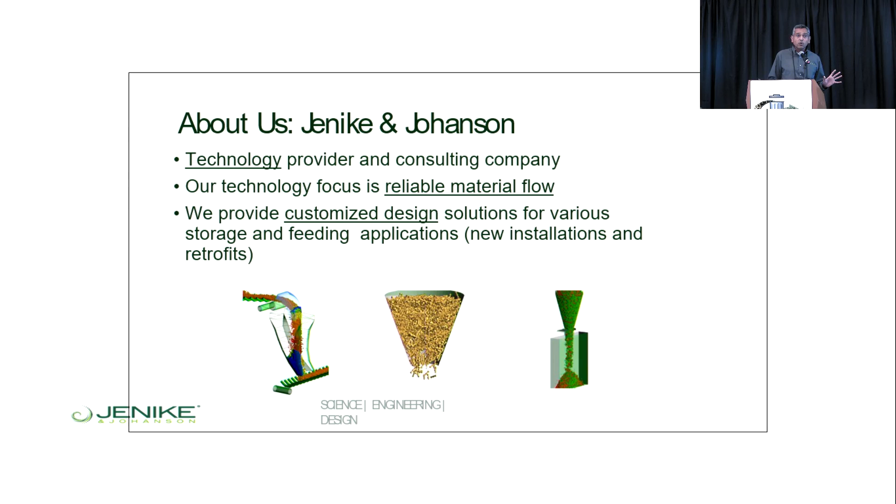So about Jenike and Johanson, really quickly, we are a technology provider and consulting company. We work primarily in the area of achieving reliable flow of bulk materials, and we provide customized design solutions for various storage and feeding applications. This applies to new installations as well as retrofit projects.

The technology of solids handling, and when I say solids handling, some people call it solids, some bulk solids, some bulk material - they're essentially the same thing from our perspective. This technology is based on the work done by Dr. Jenike in the 1950s and 60s. He founded our company based on that theoretical development, and here we are 55 years down the road, using this bulk material handling technology for all kinds of industries wherever there is bulk solids handling - whether it's mining, plastics, biomass, or waste materials.

Sorry, I think we did some last-minute conversion from PDF to PowerPoint, so you may see some text realignment - I apologize for that. But typically in any project that we do, to get to that customized design solution, the steps involved are testing of your feedstock, then analysis of its flow behavior, and then coming to that reliable design recommendation.

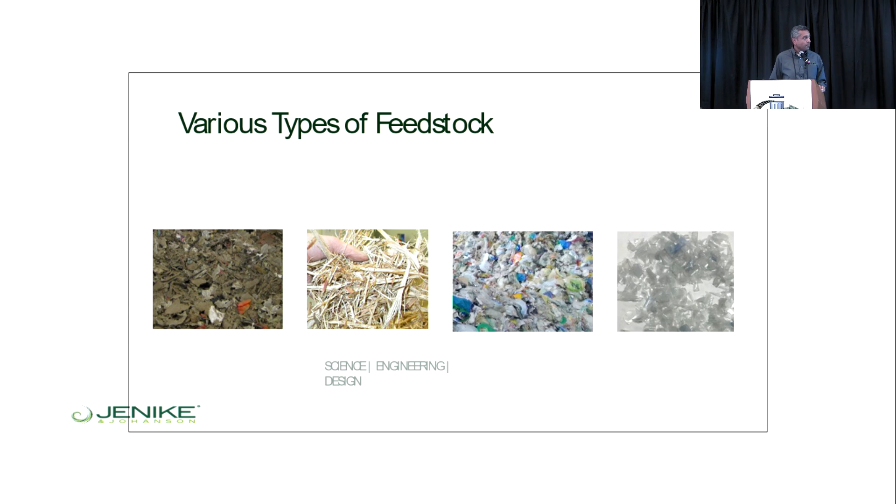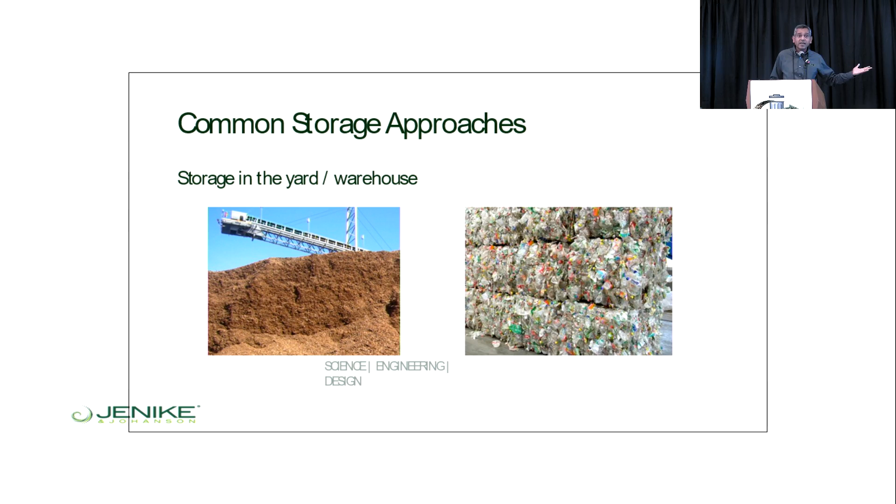Just to orient ourselves, in case you're not attuned to the day-to-day operations of bulk solids handling: for a typical waste conversion process, whether it's plastics, biomass, or any other kind of waste, when looking at handling in the yard, primarily there is a storage facility. It can be an open storage like a stockpile or pile in the yard, or a covered storage, such as a covered warehouse where bales can be kept. You'll need to reclaim reliably from these kinds of storage situations. Then there can be storages such as large silos, or there can be small hoppers which you'll be feeding out from. This discussion applies to all that equipment.

So first, let me introduce you - or many of you may already be familiar - to the various flow issues that can occur when you are handling your feedstock.

One of the biggest problems you will see, especially when handling feedstocks through bins, hoppers, or silos, is arching or bridging problem.

Here, for example, you are looking at your silo or bin, and the feedstock stored in there. That can be municipal solid waste, biomass, or some other raw material. Based on the characteristics of that feedstock and the design features of that silo - diameter, height, hopper angles, outlet size, internal surface and smoothness -

all those play a role in determining the net flow behavior. How does it perform, how does it operate, does it give you reliably the discharge rate you are looking for? All those factors together determine that.

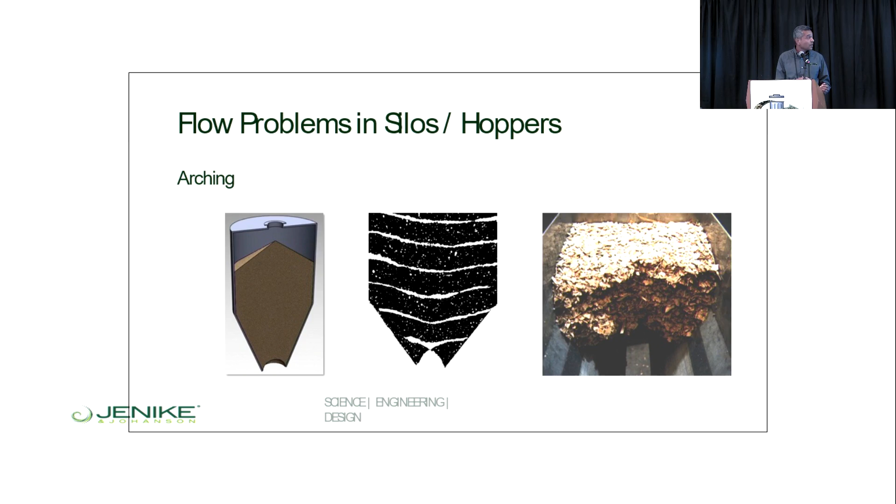All of this material here is just sitting stagnant. It's not moving - it's almost like a dead capacity or dead material. So unless something happens - either you use a lot of vibrators, air cannons, air blasters, some kind of aids to get that material moving - unless you do that, it's not coming out, and it's occupying all of your precious storage capacity.

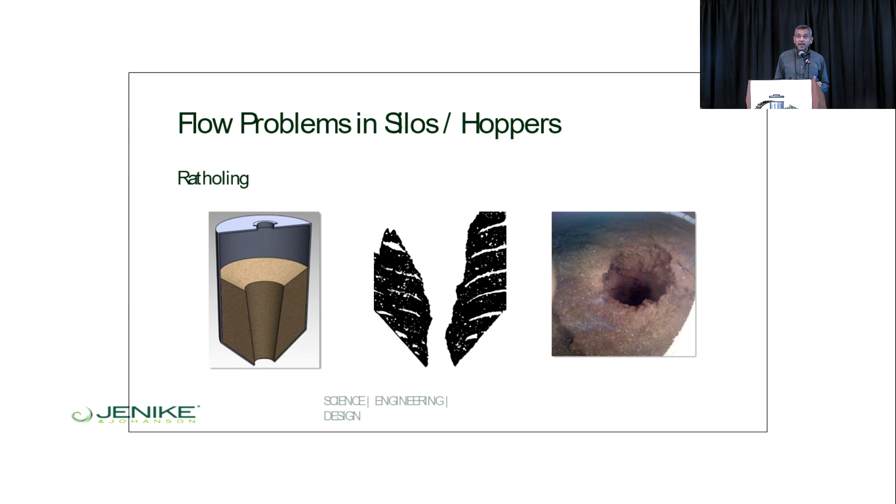So again, same kind of implication as bridging problem - when this occurs, you are not getting material out of the silo and you are starving the downstream process. Here is an example - we are looking inside a silo, looking at this flow channel here and all the dead capacity that's not discharging.

So we talked a little bit about designs of silos and hoppers. Again, when I use the term silo, it really applies to any kind of storage equipment based on gravity flow - so it applies to hoppers, bins. But the other important piece is the feeder beneath the silo, whether it's a belt feeder or a screw feeder. The purpose of the feeder is to withdraw material from the entire outlet of the silo or bin.

When the feeder is not designed properly, it often pulls a channel in the hopper section directly above it. So even if you do a good job getting the silo designed correctly, if the feeder design is not correct, you're still going to have problems in your hopper or silo, and that's still going to starve the process - resulting in erratic flow, unreliable feed to your reactor, incinerator, furnace, or boiler, as the case may be.

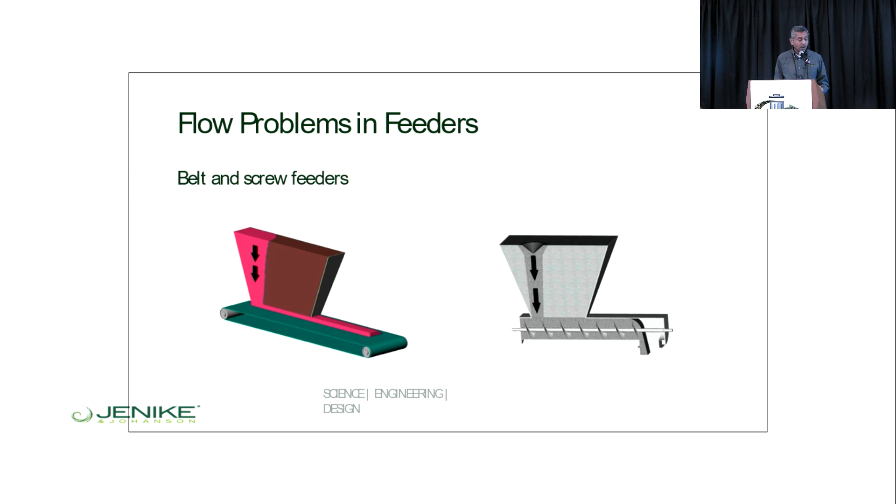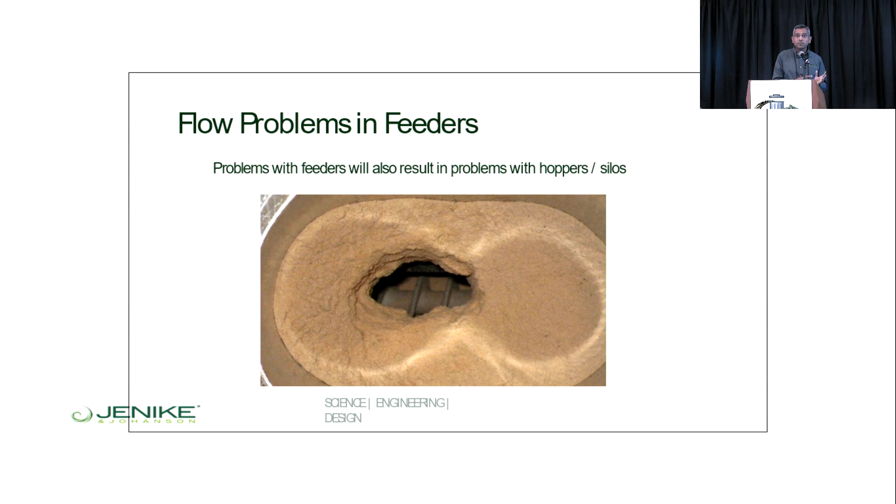So these kind of design features can really play a substantial or critical role in the success of your reactor or whatever is the end process unit. So again, it's really important to get the design of the feeding system and the storage system correct.

Another thing to keep in mind is these materials, oftentimes when we're talking about MSW or biomass, they tend to be very compressible, and under certain conditions they can exert significant pressure because of packing. Oftentimes it will result in issues such as failing of flights breaking off or welds coming off. So those kind of issues can occur when handling these materials, especially if the design is not correct.

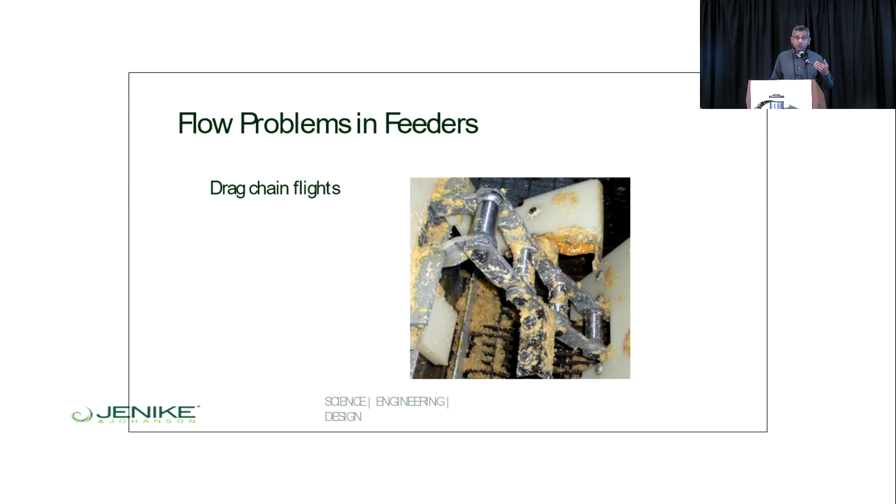Drag chains are commonly used as conveyors, but in cases when they are used as feeders directly underneath a silo or hopper, they experience significantly higher pressures. And in those cases, you can also see the flights breaking off because of the pressures and compactions.

So when you look at these problems, ultimately what are they costing? They're costing downtime, requiring manual intervention, and causing lost production. Often, whenever these problems occur, you're not able to supply to your reactor or downstream unit at all, or maybe you can supply but not at a consistent rate. There is no steady inlet stream to your reactor, and that messes up the operation of the reactor.

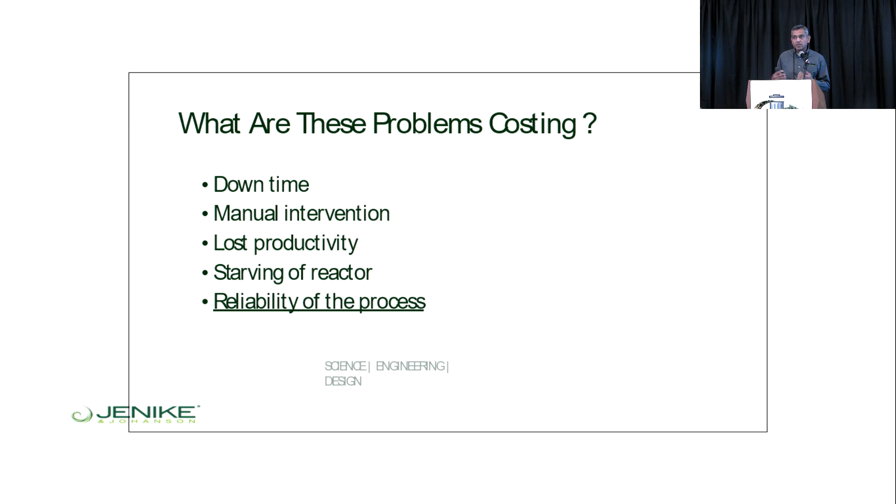So all these issues can occur, and they can take away the reliability of the process. Sometimes people look at material handling and say, okay, we figured out the chemistry, we know how to do this, we are all good. But if you can't get your feedstock reliably to the reactor, problems can still occur.

So why do these problems occur? They can occur, one, because of the nature of material or feedstock you are handling. Typically, whenever we look at waste conversion technologies, most feedstocks, whether MSW, biomass or crop waste, tend to be lightweight, having particles that are very asymmetric, slender, with nesting tendencies, interlocking tendencies, and oftentimes significant moisture content. It's the combination of these things that makes that feedstock challenging to handle.

Secondly, feedstock is only one side of the coin. You also have to look at your bin, silo, or hopper and feeder design. Even if you have challenging feedstock, if you design the handling system correctly, you can still get reliable flow. But if features of the handling system, such as hopper angles, outlet sizes, or surface finish, are not properly done, then you can have flow issues.

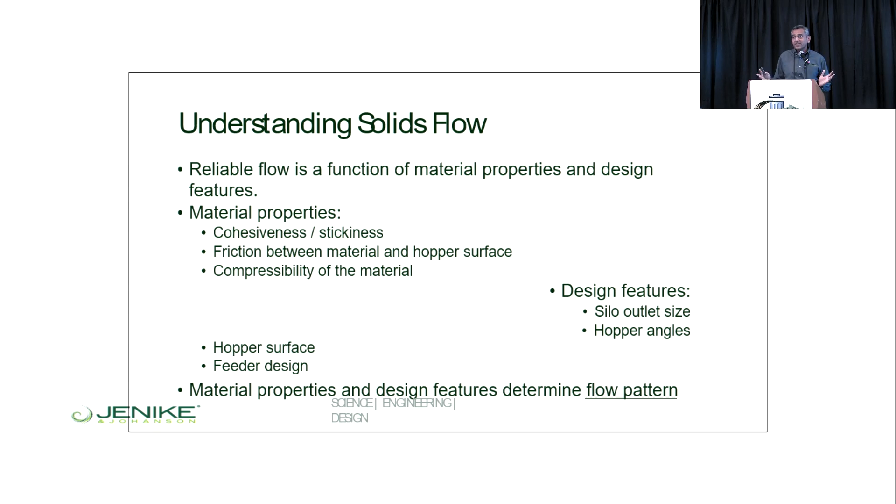Ultimately, the flow pattern that occurs inside a bin or silo is dependent on these things, and there are two main flow patterns. There is funnel flow, where, as we saw in earlier slides, a channel forms directly above the outlet, and a rat hole may form if material has sufficient stickiness, with stagnant material around it. This problem occurs when the friction at the hopper walls is so high that it causes the material to remain stagnant.

And what goes wrong when you have a problem like this? Obviously, channeling occurs. You get a first-in, last-out flow sequence, because whatever comes in first in the silo goes here and stays there until all of it empties out.

Rat holes can form, and then you have limited storage capacity because of this dead material just sitting there. Erratic discharge occurs, and particle size segregation issue gets worse.

Whenever you are handling a feedstock with fines as well as larger coarse particles, usually when you fill a silo or bin, what you will see is that the bigger particles concentrate towards the walls, and the fines concentrate in the center.

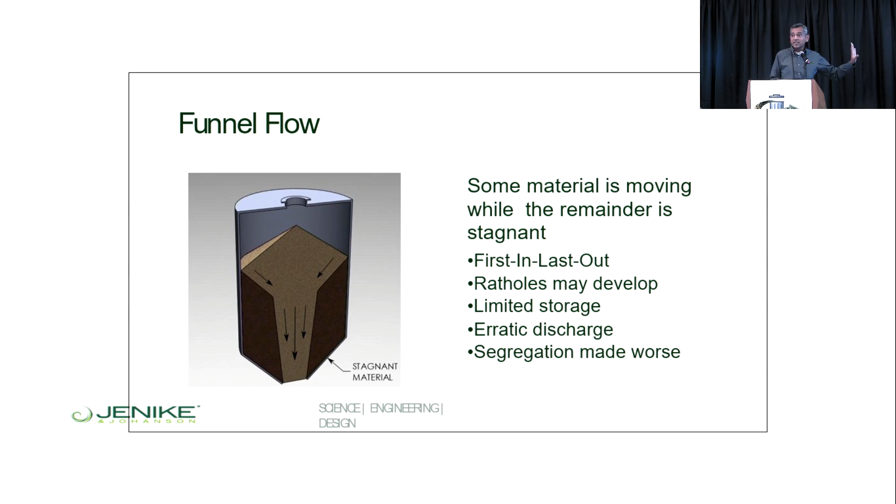So funnel flow has a lot of issues, and a good design should try to achieve what is known as mass flow. Mass flow is defined as a flow pattern where all of the material is in motion when you are discharging. There is no stagnant material.

And this doesn't happen on its own. You have to design the hopper or silo features, the hopper angles, outlet sizes, surface finish, all of that appropriately so that everything is moving when you are discharging.

But the benefits you get out of it are first in, first out, because again, there is no stagnant material. Rat holes cannot develop here. There is no channeling, and you get full storage capacity. All of the capacity is live. There is no dead region.

You get uniform discharge, and segregation is minimized because in mass flow, everything is in motion. So as you are discharging, material in the center mixes with material at the hopper walls at the point of discharge. And because of that, even if your material separated or segregated in the silo, at discharge there is some remixing that goes on, so it reduces the amount of segregation you see.

So a lot of benefits to achieving mass flow. But again, it just doesn't happen on its own. You have to characterize the material and design appropriately to achieve that.

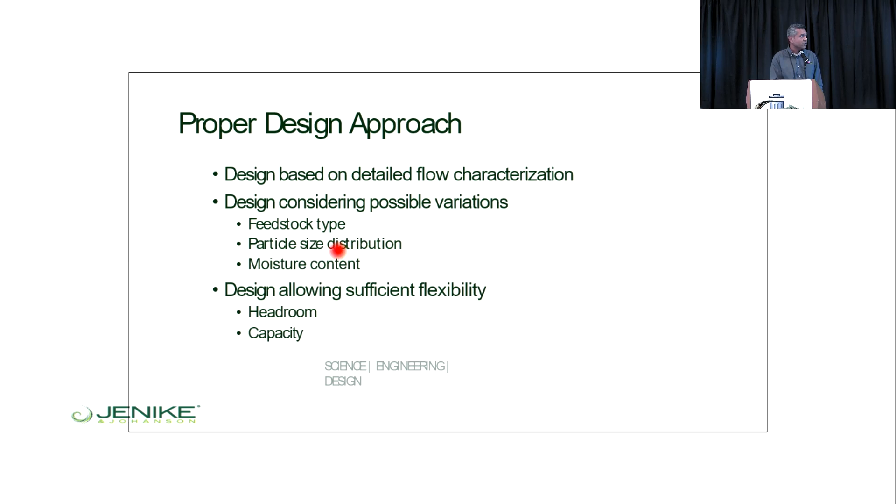So for how do you conduct proper design? Well, you conduct the characterization, get the properties of your material, and accordingly design your silo or feeders or other storage equipment, keeping in mind that these properties depend on particle size distribution, moisture content, among other things.

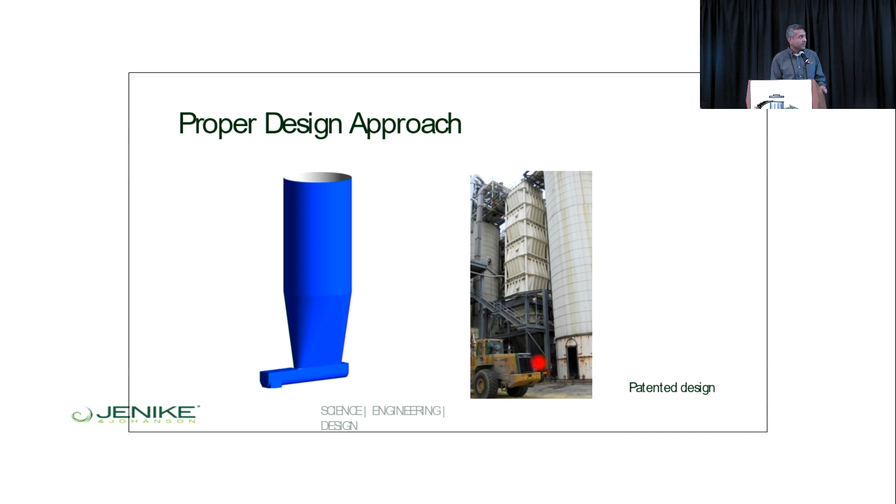And when you do that, you can design your storage equipment to achieve reliable flow. Here are just a couple examples showing how reliable designs look like for typical biomass materials. Here is one design, and here is a separate one, not this kind, but separate — that's our patented converging, diverging silo design.

And with that, I would like to conclude that technology is available to characterize feedstock and obtain that information to design material handling equipment. The design activities should be done especially considering type and nature of feedstock, particle size distribution, as well as moisture content. Doing so can save a lot of headaches with unreliable material flow.

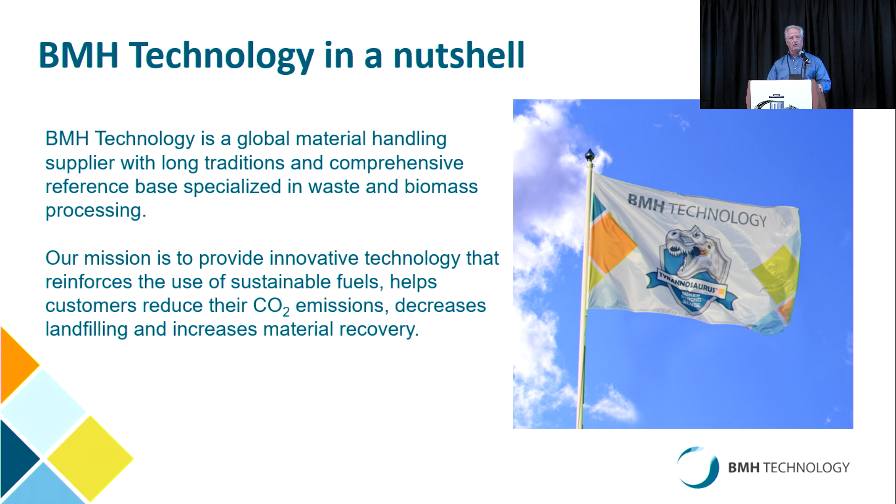In 2000, because of the drop in pulp and paper opportunities around the world, they refocused their designs on waste to energy type equipment. They redesigned their product line, designed a shredder to be the heart of their system. So their focus now is in waste refining solutions, solid biofuel, and their services department. They're focused, and their customers include power plants, chemical recycling. They still do some pulp and paper, a lot of cement kiln feeds, because we're preparing SRF, RDF from MSW, and biomass. Since 2002, they've delivered over 65 large waste handling projects, and the wood bio-based handling projects are in the hundreds.

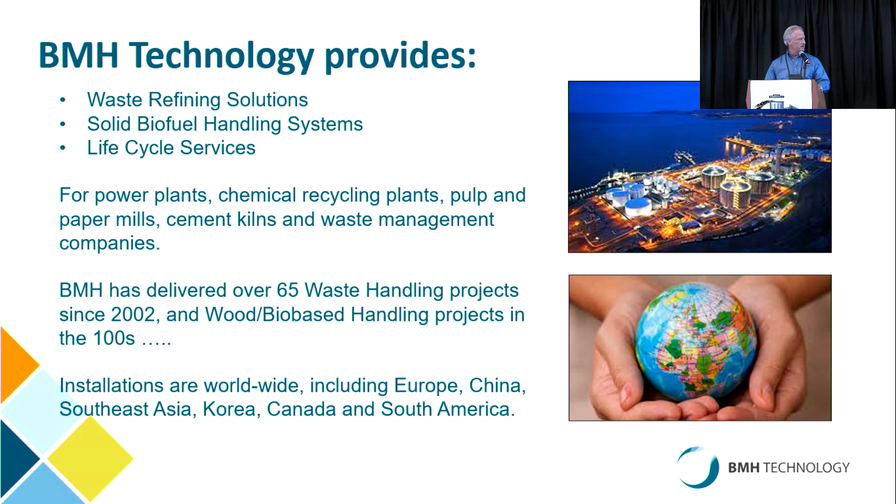Their installations are global, obviously in Europe, where waste to energy is an accepted technology. North America, less so. So their installations are everywhere but here, and we're looking to help change that for them.

You mentioned the trademark is the Tyrannosaurus. They latched onto that. They were looking for something that would help show what they were targeting their equipment to be, the biggest and baddest shredder handling equipment on the market. So the other focus they did is they looked at modular design and a compact design. Real estate's always at a premium, with a minimum footprint.

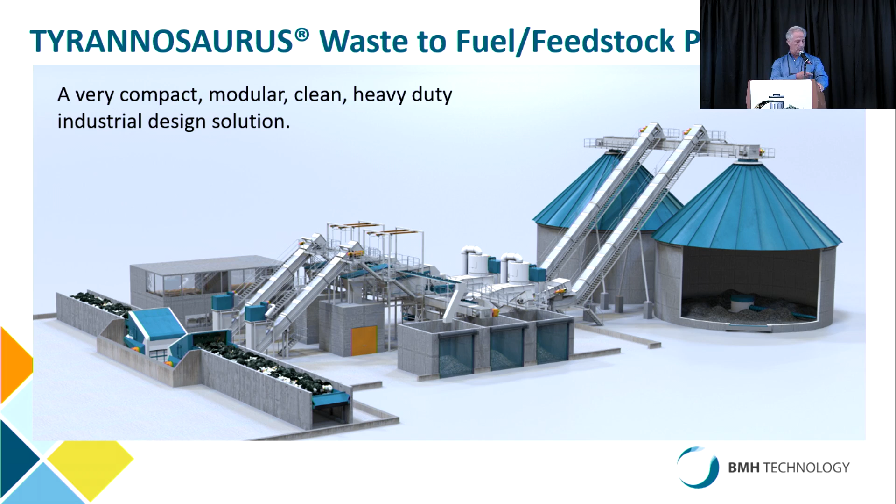Depending on the feed material and the fuel specs that you require for your processes, these large capacity facilities will typically require multiple lines of equipment processing between 30 and 50 metric tons an hour. So anytime I say tons today, I'm talking metric tons. The modular approach is typically broken into 3 modules: the receiving and crushing, a separation island, and the storage reclaim metering island. All of the components in these were designed specific by BMH for waste handling and or biomass, except for magnets and eddy currents, which is the way they buy out.

For the waste processing, waste to fuel and feedstock preparation, in the components in each of the modules, such as receiving and crushing, you have the step feeder, which is your large live buffer before the shredder, and it's got an automatic feed control to continually feed the shredder as it needs more fuel or needs more material.

The shredder, this particular model is the T9905, the largest unit they provide, with a capacity of 30 to 50 tons an hour, and that can make a product size less than 50 millimeters. Typically a lot of their facilities are feeding circulating or CFB type boilers for energy in other areas of the world, which will take up larger products up to 100 millimeters. But for gasification projects, the target is a lot smaller, around the 50 millimeter target.

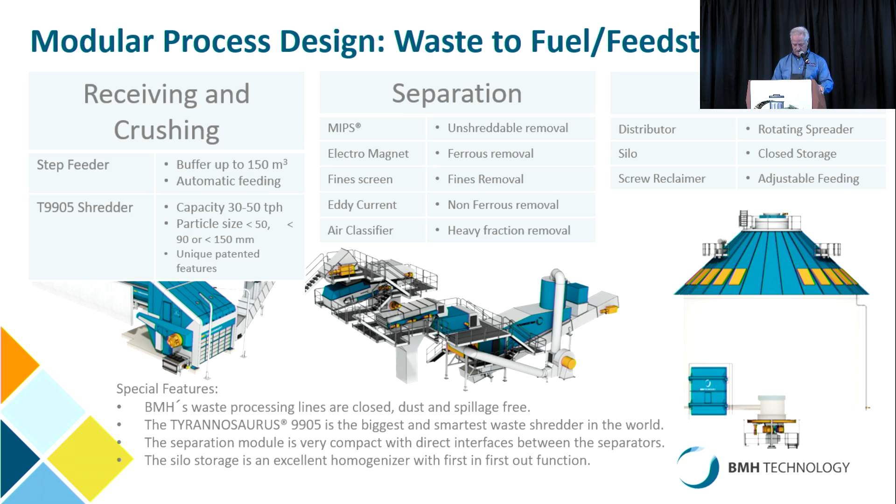And what are the Tyrannosaurus process benefits? One, it'll handle a wide range of residential and industrial waste. They're also very familiar with geographical differences in the waste supply. Obviously North American waste, European waste, and Asian waste are all different commodities, and they certainly understand all of those waste streams.

High capacities is one of the things they targeted in designing the system. They wanted to make it compact but easily scalable by adding additional lines as your capacities increase. It's fully automated, so your manpower to run this facility - you have an operator, and if you have a tipping floor and are manually feeding the feeders, you may have 4 or 5 guys feeding the step feeders, or a crane operator from above.

It's a closed system. All the equipment is enclosed. All of the drag chain conveyors feeding from island to island are enclosed, and that gives you the dust and odor control you're looking for in your system, and also eliminates spillage issues. The system has a negative air pressure and filtration system through all the conveyors and equipment, again to help support your odor control and dust explosion designs as required.

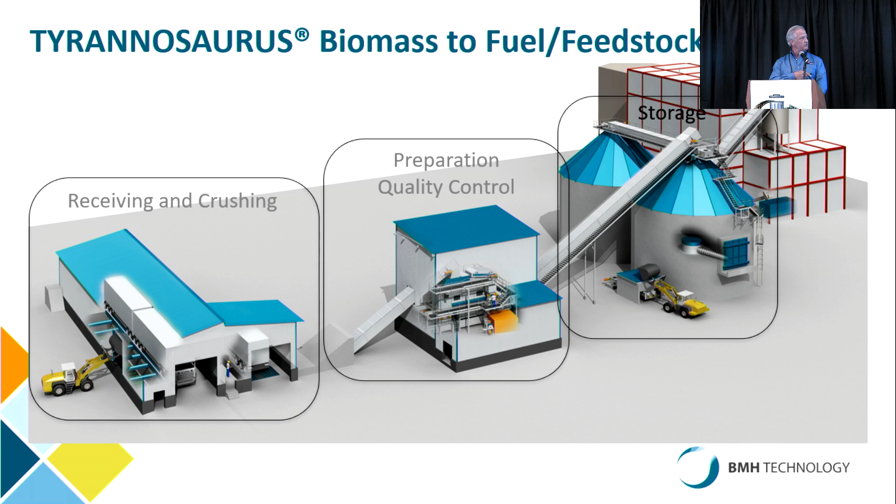Let me back up one. I should have told you a little more about the shredder, the Tyrannosaurus shredder. That shredder is the heart of their system. It's a ram-fed monoshear shredder, slow speed, 50 to 100 RPM. It's a large diameter, 1 meter diameter rotor, and the width of it's 4 meters, so you've got a very wide feed opportunity, crushing opportunity. But it's broken into 5 sections.

Each section's 800 millimeters wide, and that's part of the MIPS system. If you get a non-compressible in there, the machine will stop, open up that section, and drop out that contaminant. Instead of unloading your entire shredder, it'll only unload the section, get rid of that contaminant, close back up automatically, and go back into operation again. So what that does is help your uptime by eliminating the stoppage and going back to work again.

Zero gap cutting technology on this shredder - it's a very, very tight cutting tolerance between the cutting knives and the anvils, and it's hydraulically adjustable. So at the end of each shift, you can adjust your gap on your knife cutting quickly. And each knife rotates 4 times before you have to change knives again.

We talked about jumping ahead to the biomass. The shredder for the biomass is a twin rotor gravity-fed shredder. Their largest unit has a 6-meter-long in-feed with 6-meter-long rotors for very large capacity. It's a slow-speed shear shredder, or twin shredder, to minimize dust generation. In the screening, for quality preparation, you can have ferrous removal, oversized separation, and additional crushing.

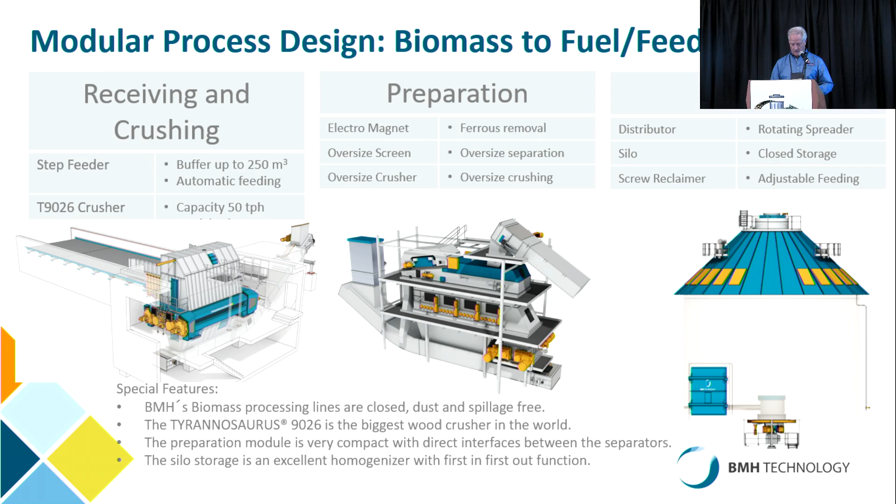We'll go over some specific installations they've installed. The first one is for Mälarenergi in Sweden, in the town of Västerås. This is a 3-line system, and their input into the plant is industrial, commercial, and MSW. This particular plant handles 480,000 tons annually. At the time, it was the world's largest integrated waste processing facility, along with the power boiler, a CFB boiler.

The plant, even though you see the field behind it, on this side it's right up against the town. So they're very proud of the facility, and they love to give tours. When the world opens back up again, we'll be glad to help you arrange to see a tour of this facility. It's quite beautiful, with a nice grass roof.

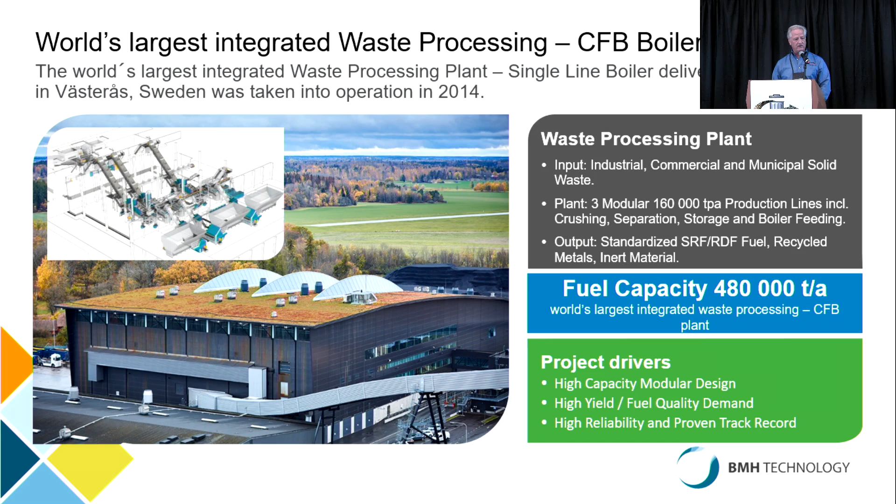Another facility in South Korea was installed and started up in 2016. It's a 2-line system, 300,000 tons a year for the feedstock. This is just SRF fuel preparation, so they take the material and sell it to the market, either for cement or energy production.

Last year, they shipped in and started up a plant in the Middle East, out in the middle of the desert. They don't require enclosed buildings there—you've got a lot of dry heat. This was a 2-line system for industrial, commercial, municipal solid waste, at 320,000 tons a year.

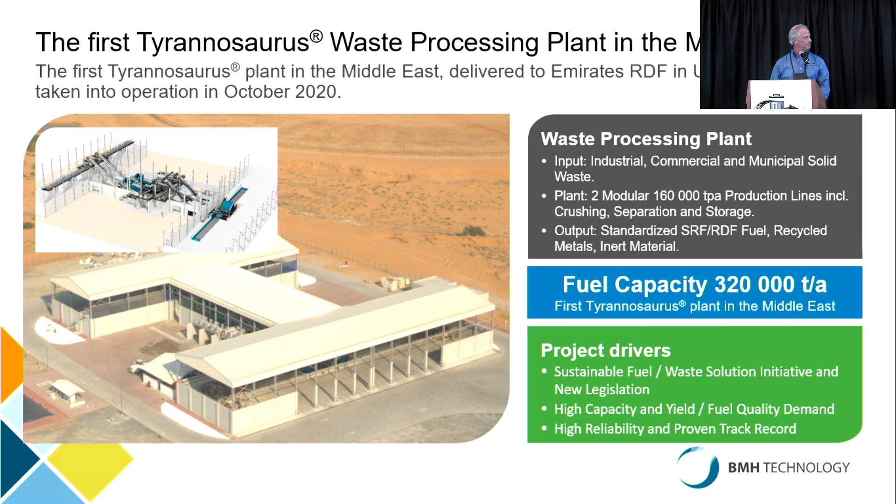For a biomass example, in Spain in 2020 they started up a very large facility, 550,000 tons a year, processing biomass, forest residues, eucalyptus, whole wood, branches, tops, and trees, feeding a 130 megawatt bubbling bed boiler. This is a 4-line system, and very large shredders are used in these.

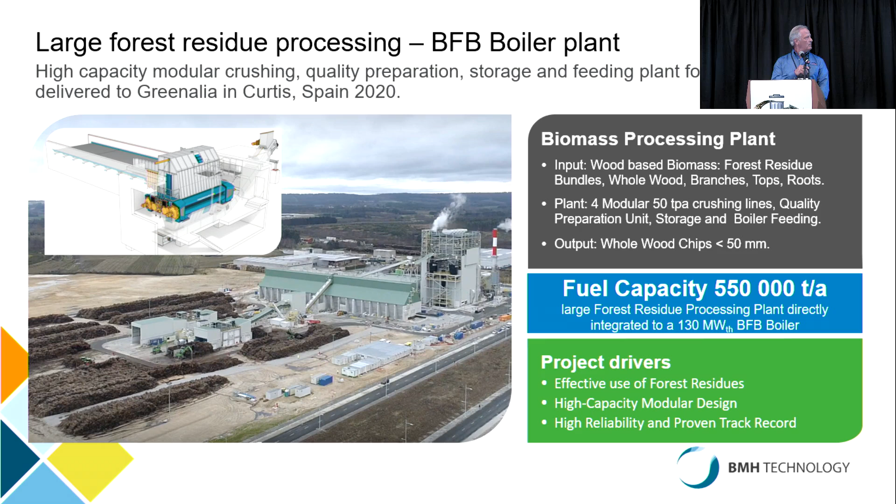And hopefully we've got a video queued up.

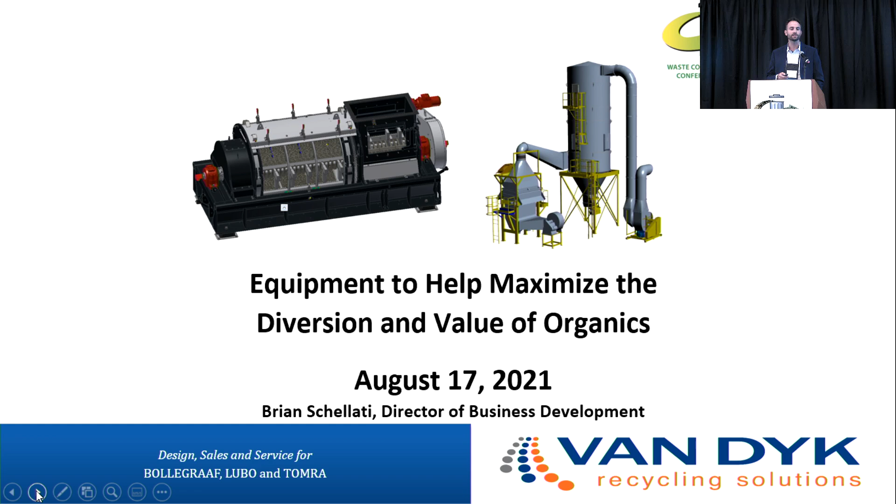Van Dyk Recycling Solutions is a turnkey sorting system supplier. We design, engineer, supply, install, do startup, commissioning, training, and after-sales service of all our equipment in many mixed material applications, such as single-stream recycling MRFs, construction and demolition debris processing, MSW and mixed waste processing, compost processing, e-scrap, and many more.

We just moved our headquarters to Norwalk, Connecticut, where we have the world's largest MRF education, testing, and training facility on site. We have 10 regional sales offices spread around North America, including 35 factory-trained service technicians throughout North America, including Canada and Mexico.

We put a real strong focus on service and making sure that all of our plants in operation experience minimal downtime. One of the many ways we do that is we keep over $19 million worth of spare parts in our Connecticut warehouse, which has at least 2 of every spare part required from any of our pieces of equipment all over North America.

We were founded in 1984. Since then, we've completed over 1,800 recycling projects. We've delivered over 450 full turnkey MRFs or plants. That includes over 550 sensor-based sorters or optical sorters and over 400 Bollegraaf balers.

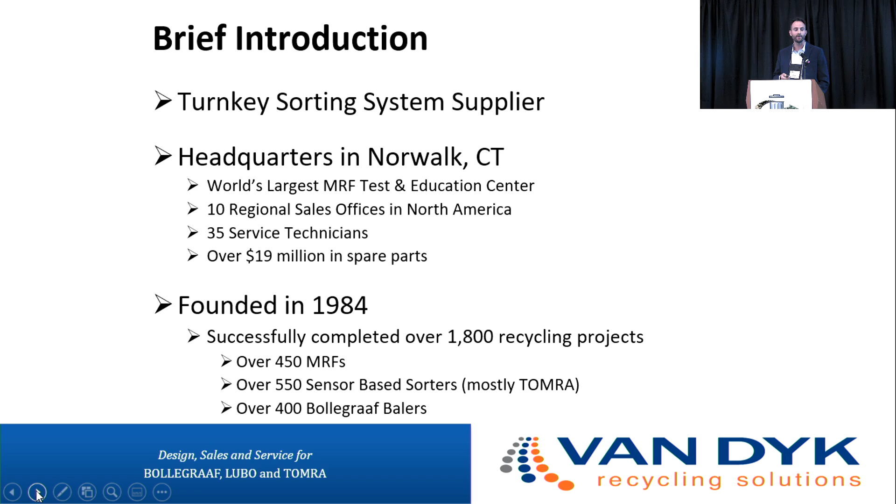This is what our new test facility in Norwalk, Connecticut looks like. Basically, we could take samples of mixed materials from our customers or from companies, and we can run it through our test facility, run the test, create a test report, be able to give real estimates on equipment capacities.

We are able to give real estimates on what is in the material that's being processed or what's in the sample, what of those materials can be recovered, and to what level or purity that material can be recovered. It's already been extremely valuable for several project developers, MRF operators, and also packaging companies.

The first piece of equipment I want to speak about is called a Smicon Organics or food depackager. There are several other types of depackagers that specifically California, some California waste haulers are already starting to use. This one is a European model. It was developed and really field proven over in Europe for over 20 years now. There's many of them in operation in Europe. We've actually just had our first one installed right here in San Diego that is now operational.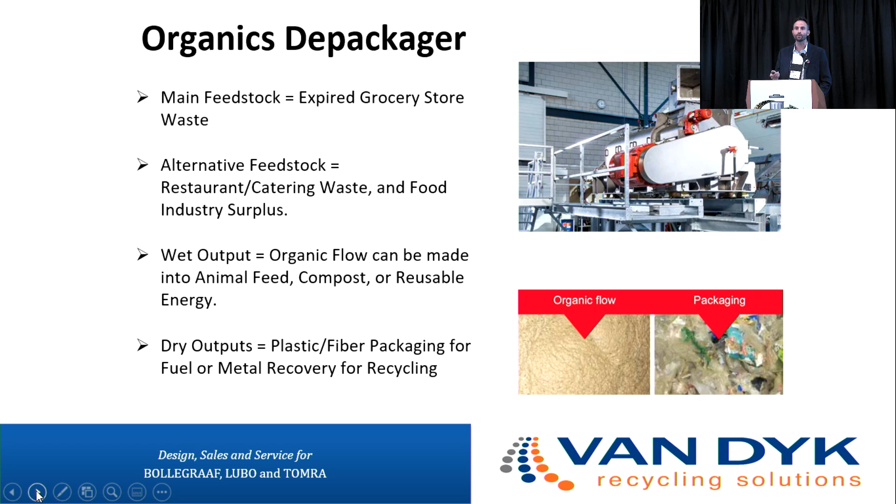One of the main advantages is that this one operates at an extremely high throughput, roughly over about 30 tons per hour, with minimal downtime, regardless of any type of input contamination. So how does it do that?

A couple key features. First, it has the original swing hammer design, so the paddles inside the unit, which you could see here, they're flexible. So if a heavy piece of contamination, like a big piece of steel, goes into the piece of equipment, it's flexible enough not to have that contamination damage the screen inside or cause any unexpected downtime.

Also, there's an extremely large inlet, and below that inlet is where we have the smallest holes in our screen, and that's really to maximize or keep the organics as clean as possible in that impact area at the beginning.

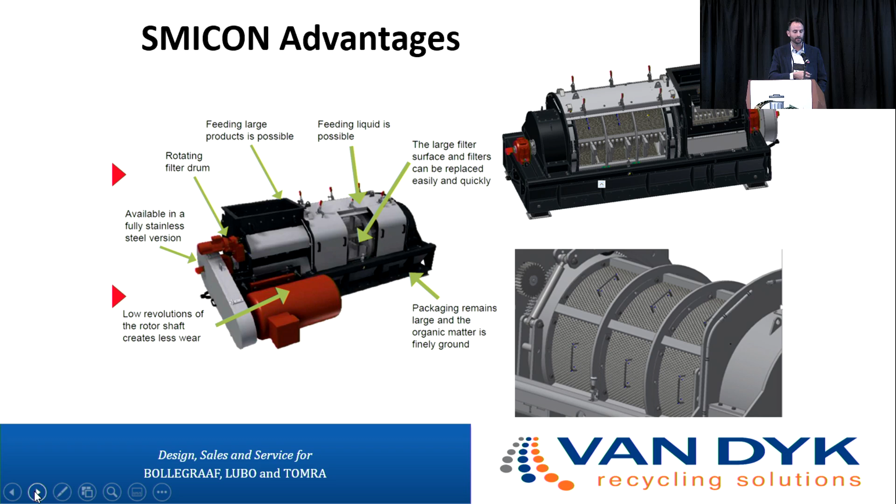Let's see if the video works.

There we go. So this is actually a video of one of our mobile demo units. It's a full-scale unit that we can send to a customer's site to do a demonstration and to process some of his actual material.

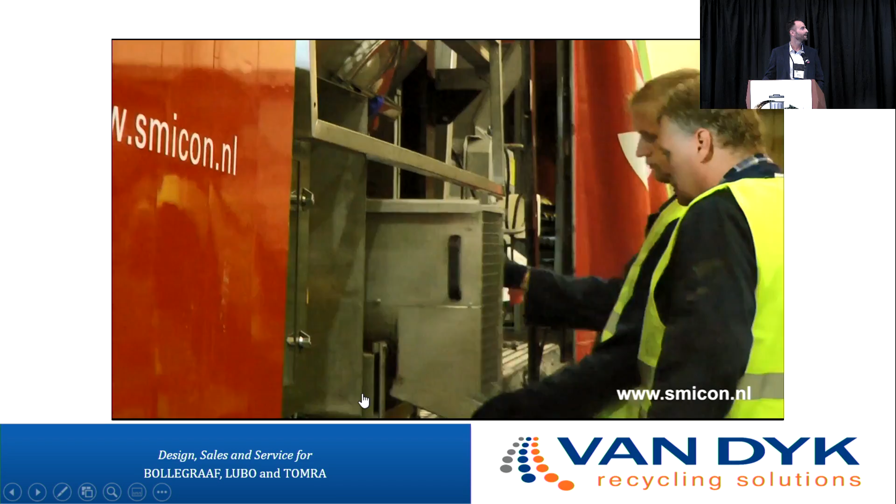You could turn the sound off. So you can see they're just setting it up on site.

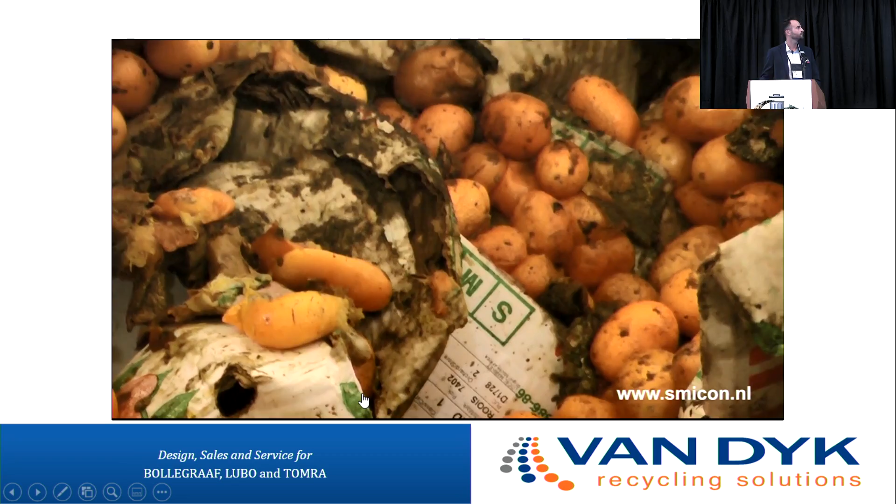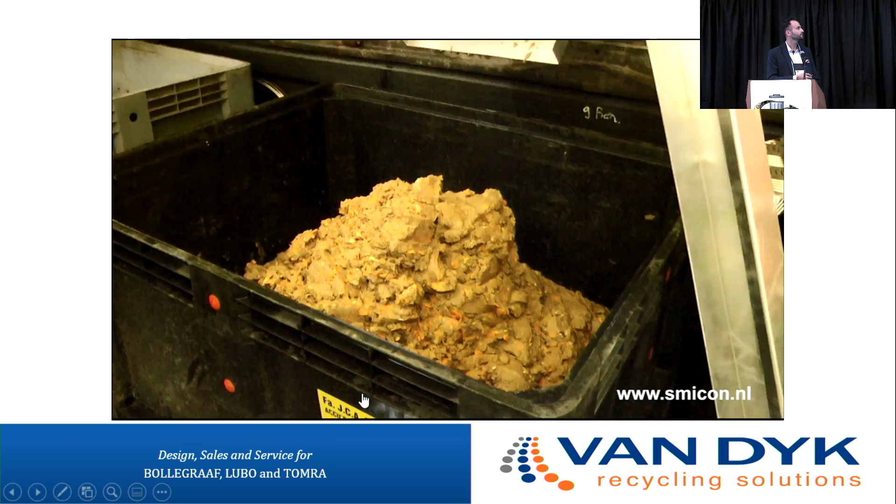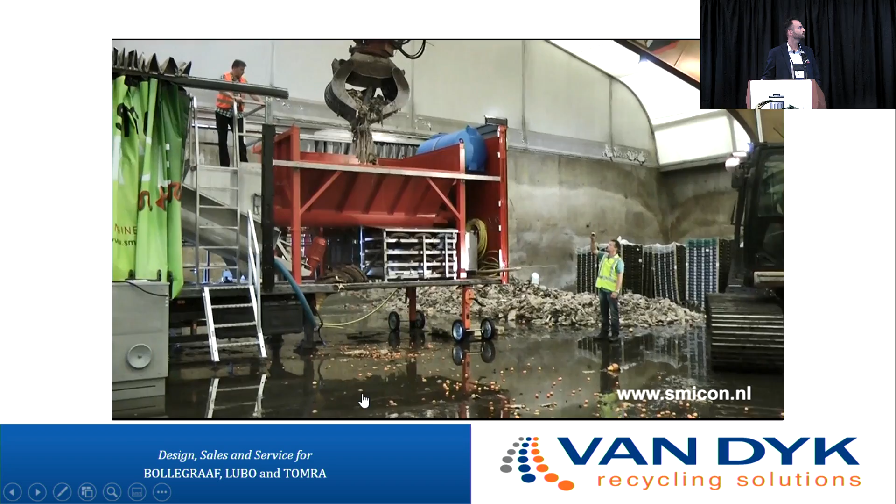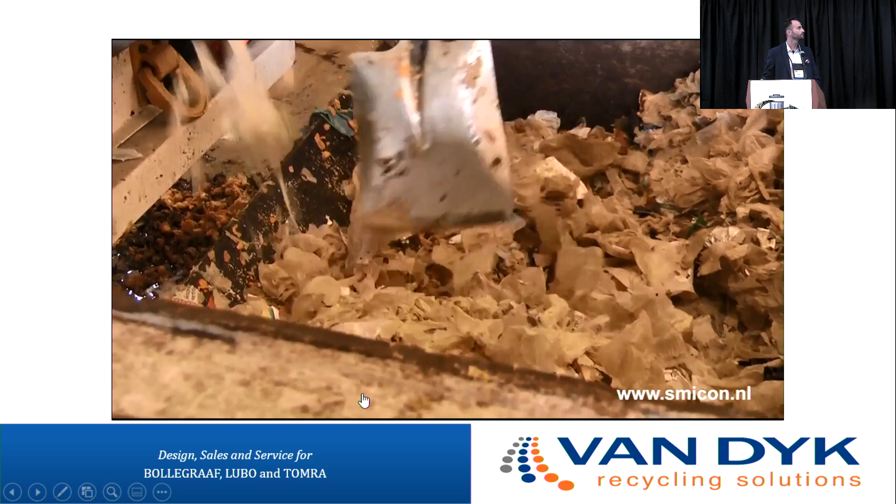So this is contaminated, basically source-separated organics, but it has some packaging mixed in with it, so we're separating the organics from that packaging, mostly cardboard. And this is an example of it running more traditional grocery store waste, packaged food goods.

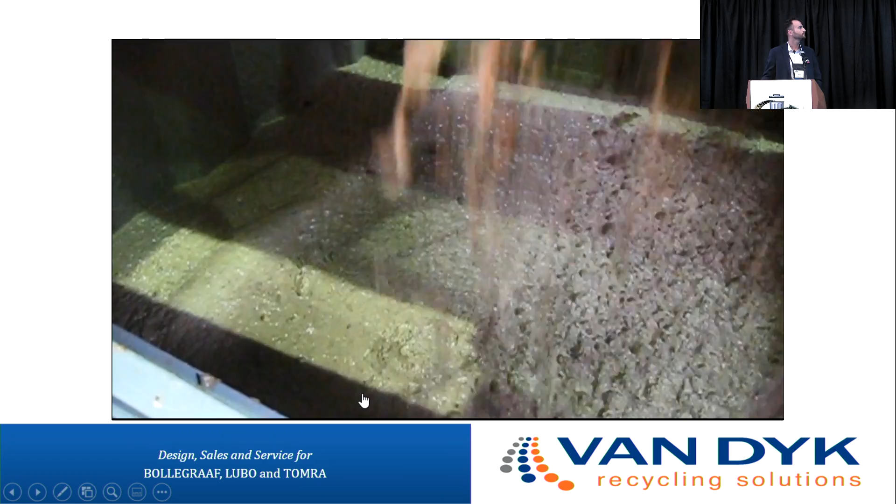Okay, so we basically talked about one way to process wet organics and remove contamination. Now this is the next piece of equipment I want to talk about, and it's to remove contamination from drier organics, specifically from compost.

A lot of wet organics from especially MSW processing usually goes to anaerobic digestion, then composting, or sometimes just directly to composting. The result is that compost is highly contaminated, and because of that, it has limited or no value. So this is a densimetric table, or D-table for short. It is specifically designed to be a final composting step or finishing step for compost.

Each unit can run up to about 20 tons per hour, and it will remove over 99.5% of all heavy contamination, such as glass, stone, and metal. Typically compost from MSW will have upwards of 10% glass by weight in it, so this would remove over 99.5% of that type of contamination.

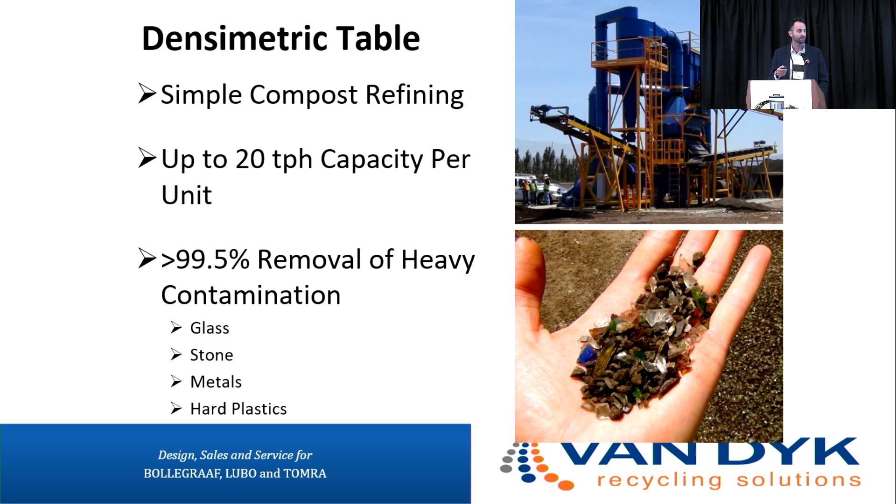So how does it work? This is a schematic showing the operating principle of the densimetric table. The basically finished compost before this piece of equipment would come through this in-feed section right here. It falls on an angled vibrating plate.

There's air from a fluidizing fan that blows up through small holes in the vibrating angled plate. The light fraction, or the compost in this example, would get lifted up by the air, and then with gravity would fall out the bottom side outlet. Any of the heavy contamination, like the glass and the stone, would sit on the vibrating plate and gets transferred up the plate via friction and falls out the top side outlet.

Any very light compost or dust would get pulled out of the exhaust ductwork and goes to the dedusting system. Once that is cleaned up after a cyclone, it can actually be combined back with the finished compost if desired. There's also a sensor inside the exhaust system that simply regulates the exhaust fan. So it's a very simple piece of equipment to operate, literally just an up and down fan control, depending on the moisture of the compost.

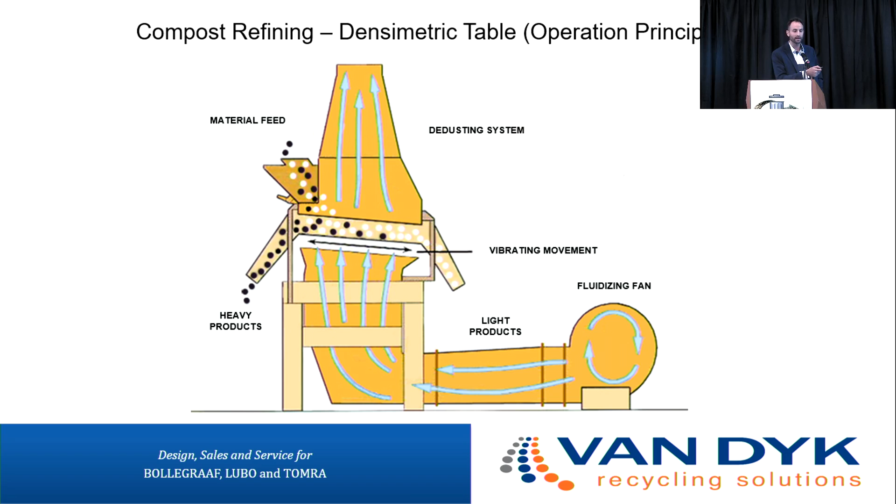So, another video. This is an installation at a composting operation in Northern California that is composting very contaminated organics from MSW. We've actually just had a more recent one installed in our new MSW MRF in Santa Barbara, which also has an anaerobic digestion plant in it and composting.

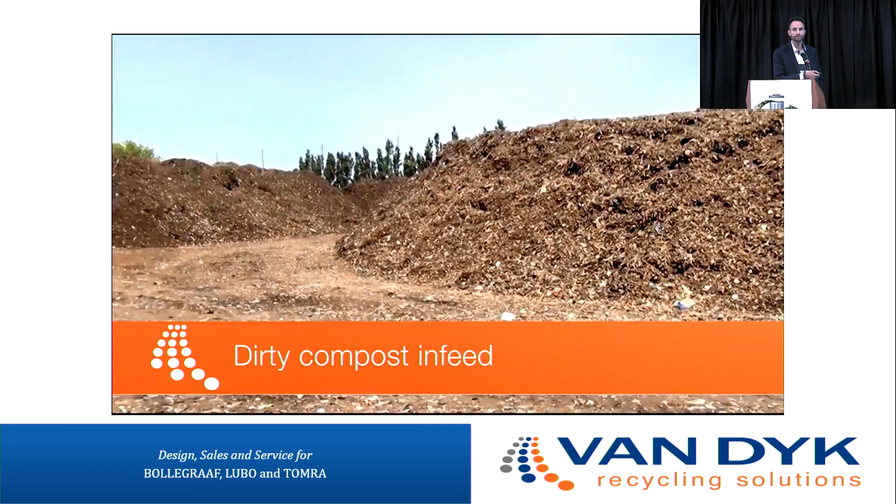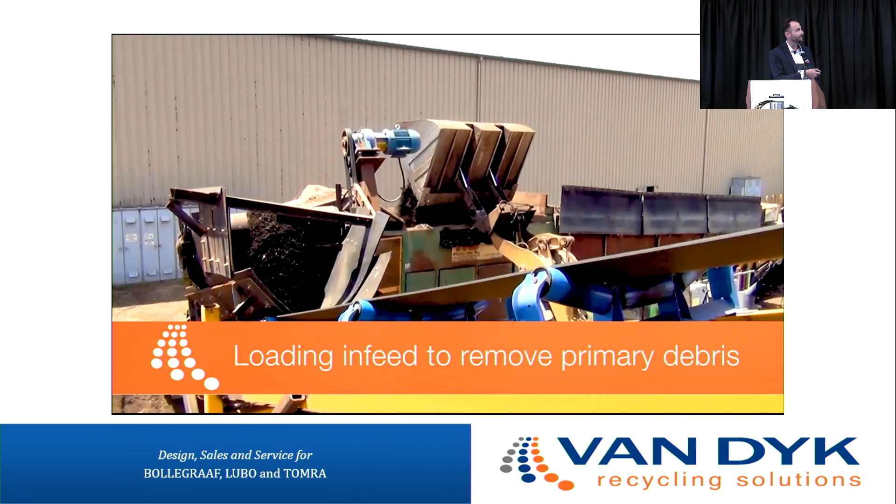So this is the dirty compost before any type of screening. This is not a piece of equipment that we supplied, just a normal compost trommel where they're doing screening of a 1/4 inch minus. That 1/4 inch minus is their finished compost that goes to the densimetric table. You see here the overs of that trommel coming out - that's just large contamination.

All of this separation pretty much happens right here on that angled vibrating plate that I described. You'll see the heavies come out to the left, the lights or the compost comes out to the right.

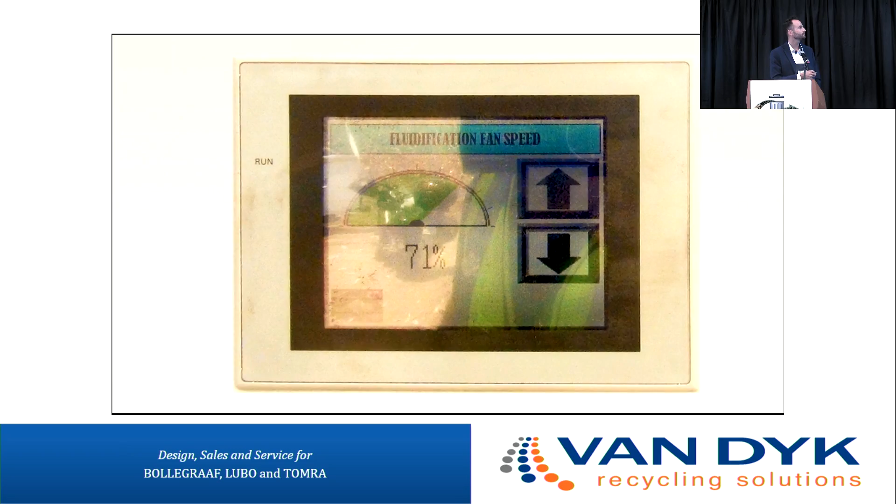This is basically the simple control panel. Like I said, it's literally just an up and down control for the fluidizing fan. Basically, the higher the moisture, the higher the fan speed, the lower the moisture, the lower the fan speed.

So this is showing the heavy contamination, the glass and the stone and the metal and the heavier plastics coming out.

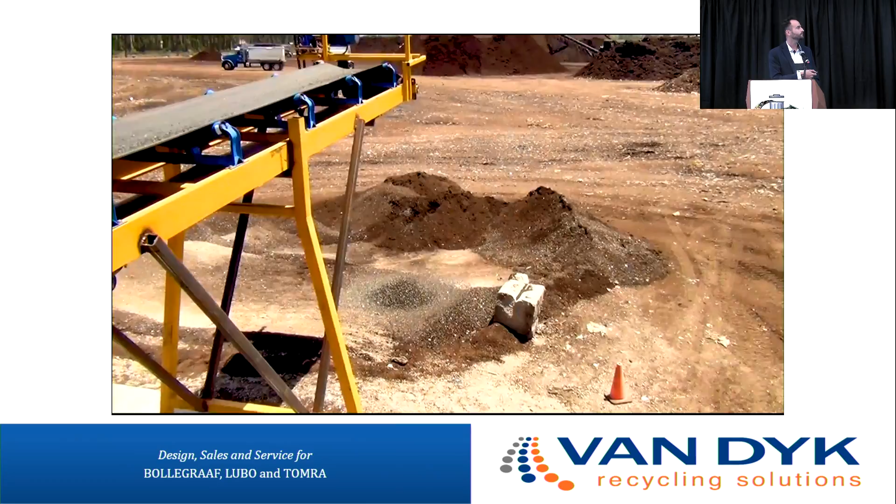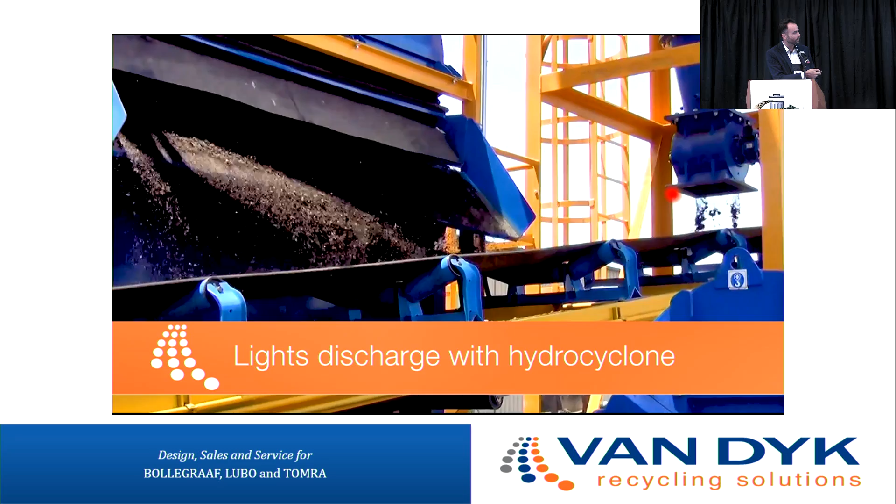And this is the clean compost fraction. Also, you see here the cyclone that would take, after the dedusting system and the exhaust, very fine compost gets blended back in.

And this is pretty much 99.5% or greater contamination-free compost, which now actually has quite a bit more value than before this finishing step. Without this finishing step, when you see a finished compost pile from MSW, whether there's 2% glass in it or 3% glass or 10% glass, as soon as the sun hits it, it's like a shimmering mountain of dirt. So right away, compost like that gets rejected.

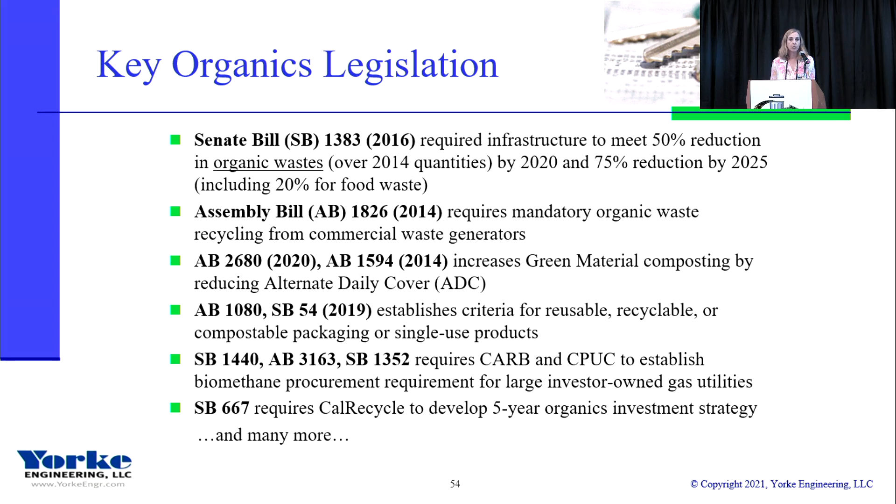As many of you are well aware, there's a lot of key regulations in California. These are the key organic waste diversion regulations in the state right now, and they are driving a lot of these organic projects, whether it be waste to energy or composting, et cetera.

Yorke Engineering, who I work with, we've permitted a whole bunch of different types of organic waste diversion projects. This whole talk will focus on these different technologies - there's a wide variety that I think most of you are all well aware of.

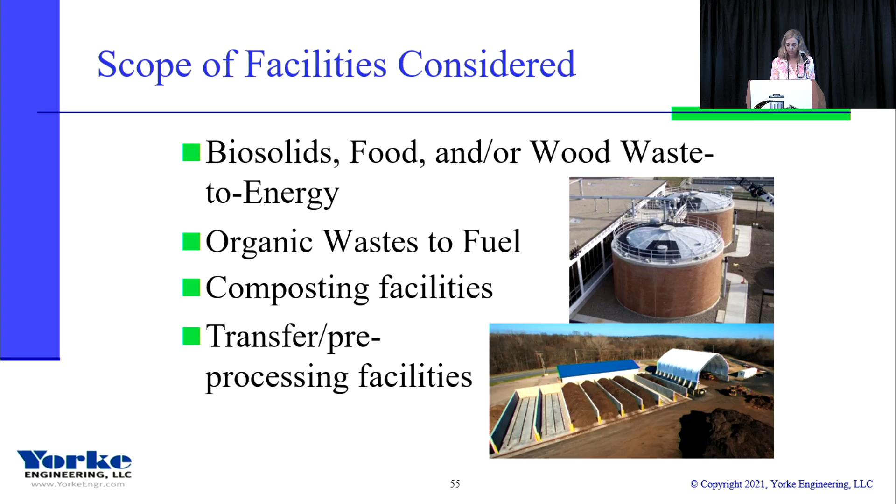So permitting and CEQA. In California, there are 35 different air districts, and each one permits differently. So that's a real challenge right there in the state. What do the air districts need to look at? Their objectives are to regulate the emission sources, meet new source review, protect public health and welfare, and facilitate state goals like AB 32, which is greenhouse gas regulations and landfill diversion.

CEQA, which is the California Environmental Quality Act, has a different focus. It focuses on identifying significant environmental impacts and encourages quite a bit of public participation. CEQA is overseen by a CEQA lead agency, which may be the county, the city, it could even be the air district, it could be another agency. There are unknown numbers of CEQA lead agencies.

So every time you get a new project, you almost are guaranteed to get a new CEQA lead agency. So you've got another agency to try to figure out and deal with. CEQA is triggered when a project must get a discretionary governmental approval, such as a conditional land use or zoning change, or even some air permits will trigger the need for CEQA.

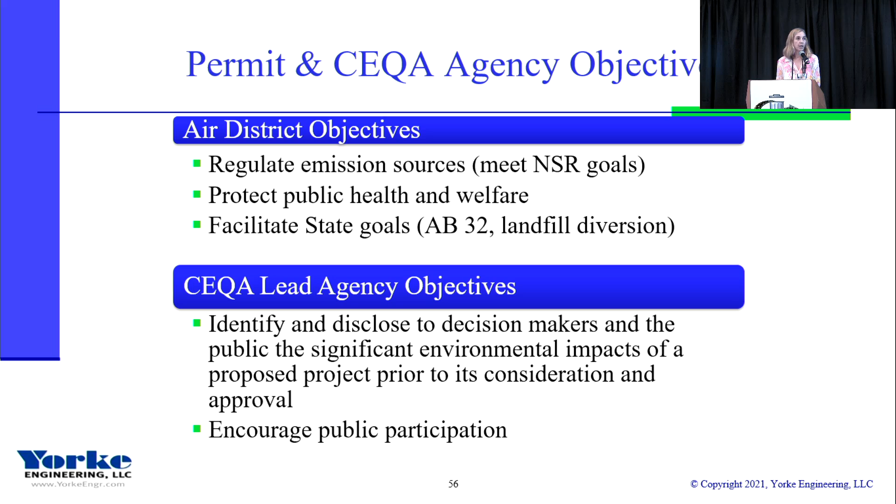CEQA involves analysis of 18 different technical areas, environmental areas, and we'll focus today just on air quality and greenhouse gases.

So CEQA and air permitting - key, before you start your air permitting and CEQA projects, is getting your project scope and your emission inventory. Those go into an air analysis, which then will go into your CEQA documentation and your air permitting. It is best if you get your project design well defined without any changes going on or design modifications as you start into the process.

Because both CEQA and air permitting need a certain number of analyses, and they're quite dependent on all the different aspects of the design features. It can take longer to conduct the CEQA review than the air permitting, so you would probably want to consider your CEQA review before your air permitting.

In CEQA, when you look at CEQA, you need to look at - air permitting actually looks at all just the stationary sources, so pretty much anything with a stack primarily, or anything that's not moving on your site. CEQA also examines your mobile sources, and it examines your non-permitted sources, so small engines, and it also examines the construction of your facility.

So for CEQA, CEQA analyses can be a little not as in-depth for a mitigated negative declaration, which is a document that looks at a project that is expected not to have any significant impacts. And that usually can take somewhere in the order of 3 to 6 months to get through that CEQA process.

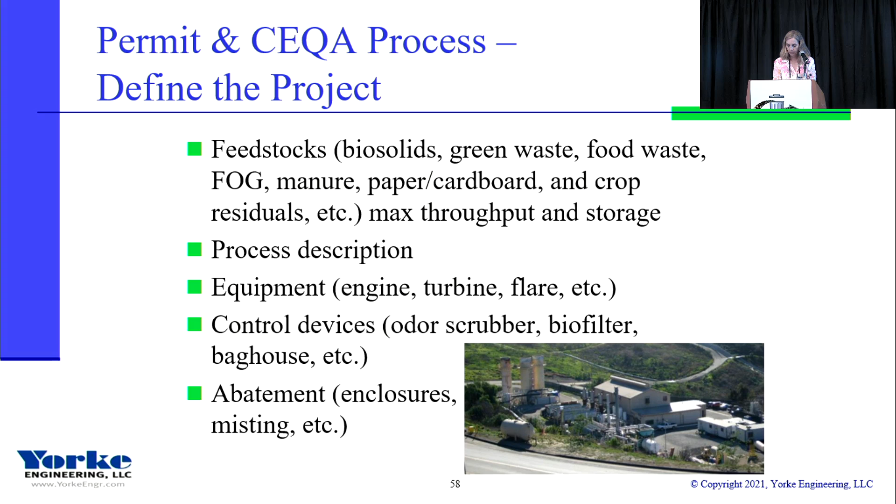Air pollutants. Due to the fact that a lot of organic projects are sort of a newer technology for some of the air districts, making sure that you define what your emissions are prior to starting has a fairly major trickle effect throughout the whole permitting process.

So you'll need to define what your criteria pollutants are. What are your VOCs from the organics? What's your particulate matter from your material handling and your on-site truck travel? What's your nitrogen oxides and carbon monoxide from your combustion, your greenhouse gases? Even if they are considered biogenic, they need to be well defined.

Air toxics, there's quite a few that need to be looked at, and ammonia and diesel particulate matter can be pretty big drivers from an air toxic standpoint, and they come from all different sources, like your biogas combustion, composting, stockpiles, pretty much everything. And then odors, from a permitting standpoint, are regulated as a nuisance, and in CEQA need to usually have a little more in-depth analysis to make sure that you're not going to be impacting the neighbors.

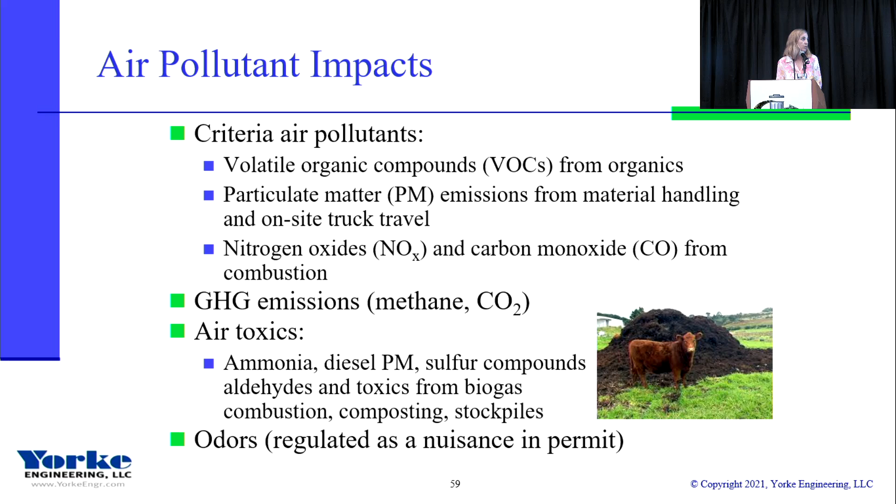Emission quantifications. So emission calculations are all based on the emission factors, and default emission factors generally tend to overestimate the emissions from facilities like this. Very conservative analyses have been done to develop what some districts may call default emission factors.

So one thing that may be of value when you're in the initial part of your permitting process is to think about doing some source testing to develop better emission factors. You may want to look at source testing from stacks, buildings, combustion sources, or emission monitoring, such as for non-point sources like compost piles.

So what are the emissions used for? You'll be using them in air permitting for new source review. With our 35 different air districts, they all have different thresholds of where you need to meet these different requirements and which one gets triggered.

So best available control technology, BACT, will be the controls that you need to put onto your units. In some districts, the threshold is per permit unit, so if you have two engines using your biogas, for example, each engine would be examined for BACT, and they need to meet certain permit levels. The trigger can be as low as 1 pound per day for criteria pollutants for BACT in South Coast Air Quality Management District. Here in San Diego, our criteria is 10 pounds per day, so it really varies between districts. BACT may be an emission limit or an abatement technology. And don't just think it's only the stacks that need BACT—compost piles need BACT, and even your odor control systems need to meet BACT.

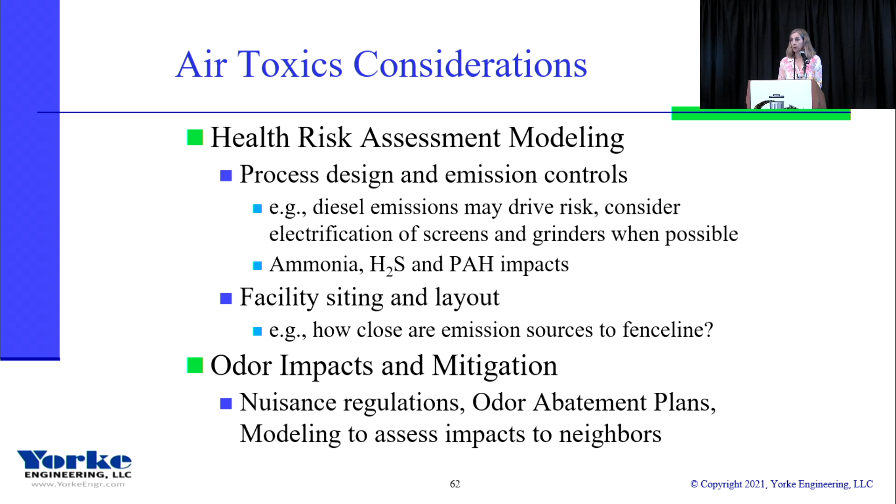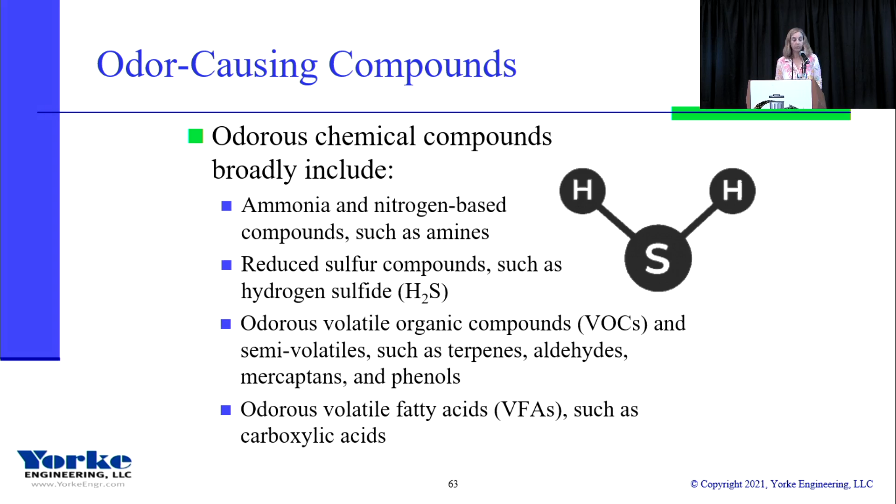Odors come from a variety of chemicals and combinations of chemicals. Most of the time, odors are considered a nuisance as opposed to a health hazard, but they can be both. So an assessment of potential odor can be done using surrogates, such as ammonia or hydrogen sulfide. This is one thing you want to consider.

You'd want to consider odor controls for air permitting. A lot of times they're the same as your VOC controls—maybe carbon adsorption, thermal oxidizers, wet scrubbers, biofilters, etc. You can also use odor minimization strategies such as remote location or distance to neighbors, design features like enclosures or covers, or even misting can be effective.

Odor modeling for CEQA—as the plume extends downwind, it expands both vertically and horizontally, and then dilutes as it goes downwind. So the odor modeling either uses surrogates or uses a dilution-to-threshold concept, which is basically how many times an air sample must be diluted until the odorous air is no longer detectable.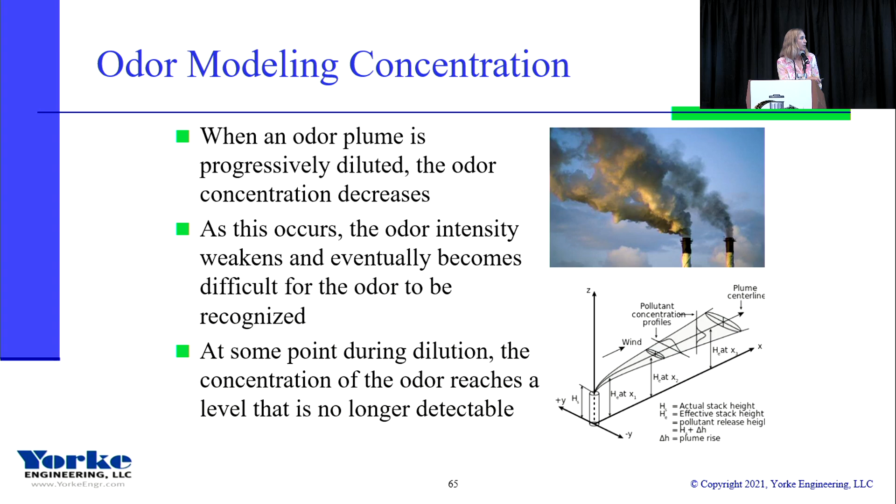Okay, odor modeling—here's an example of odor modeling results. You get the concentration and compare it to certain thresholds.

One thing to consider is that odor detection thresholds are quite subjective, and every agency likes to come up with their own. For hydrogen sulfide, for example, 0.008 ppm is the South Coast nuisance threshold, which is an odor threshold, whereas a health threshold in California—we have an ambient air quality standard for hydrogen sulfide of 0.03 ppm—is much higher than that odor threshold. So you can see that this is not at all health impacting at this level.

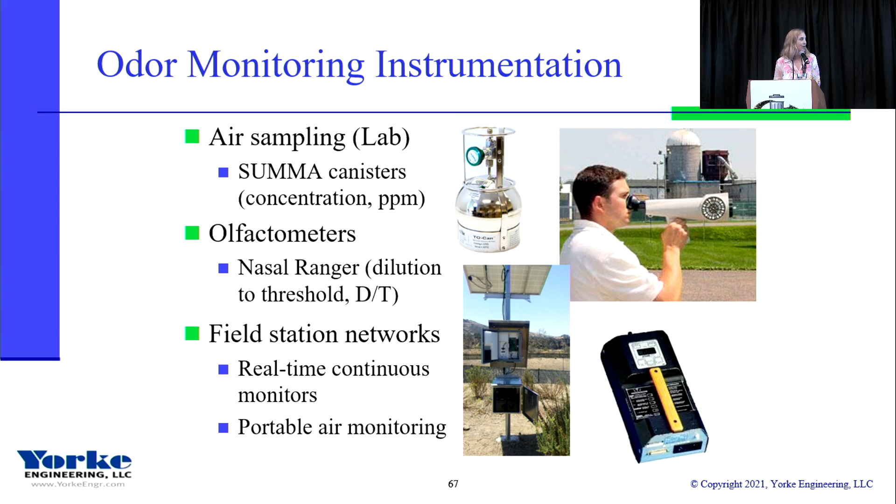You can also do odor monitoring if your facility is existing, to confirm that there isn't an odor issue, or that there won't be an impact if you have an expansion, for example. Odor monitoring can be done with SUMMA canisters, where you could also get your VOC or air toxics data. You can use the Nasal Ranger, which is really fun—that's the nose cone thing—to get your dilution-to-threshold factors, or real-time monitoring, with a permanent or handheld device.

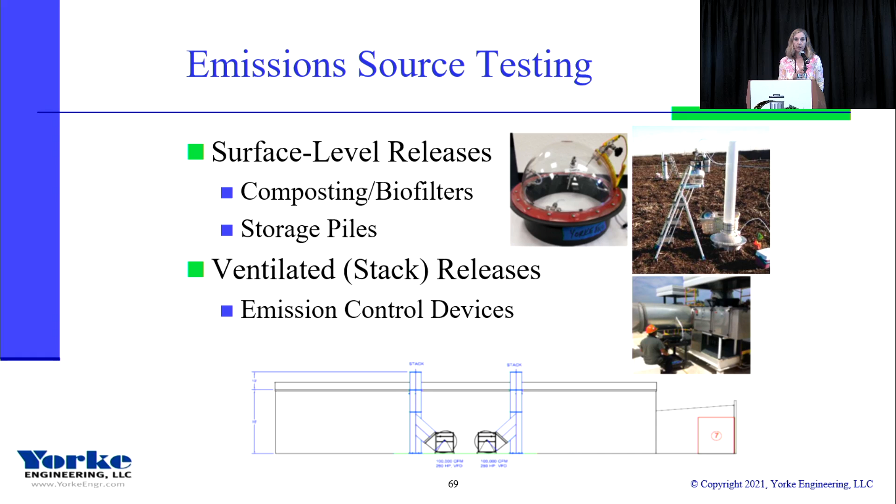Emission source testing: you can look at doing things like a flux chamber if you're looking at composting or storage piles, biofilters, or your typical stack testing for stacks and emission control devices. Most likely, one of these will be necessary once you get your permit as a compliance demonstration.

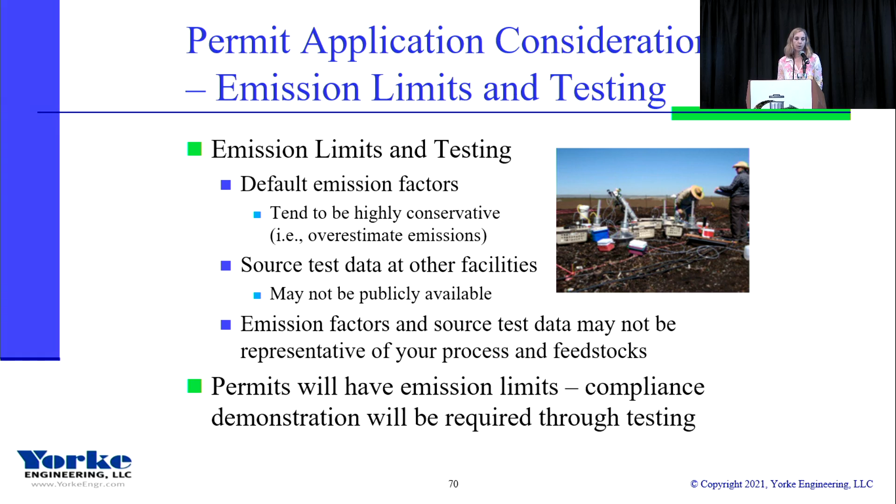Back to emission limits, and back to emission factors and understanding—they have such a trickle effect through your permitting that it's really key to develop early in your permitting what emission factors you will be using. A good way is to use default emission factors that the district approves or you've got from literature, but source testing from other facilities might be helpful. The one thing to be careful of is that emission factors and source testing need to be representative of your process and your feedstock, so those can be really variable. Once you do have your permit, a compliance demonstration will be required through testing.

Process monitoring: once you have your permit, you'll need to do some process monitoring. When negotiating your permit conditions, keep in mind that the monitoring they're requesting can be onerous or costly, so you'll want to make sure you negotiate reasonable monitoring considerations into your permit.

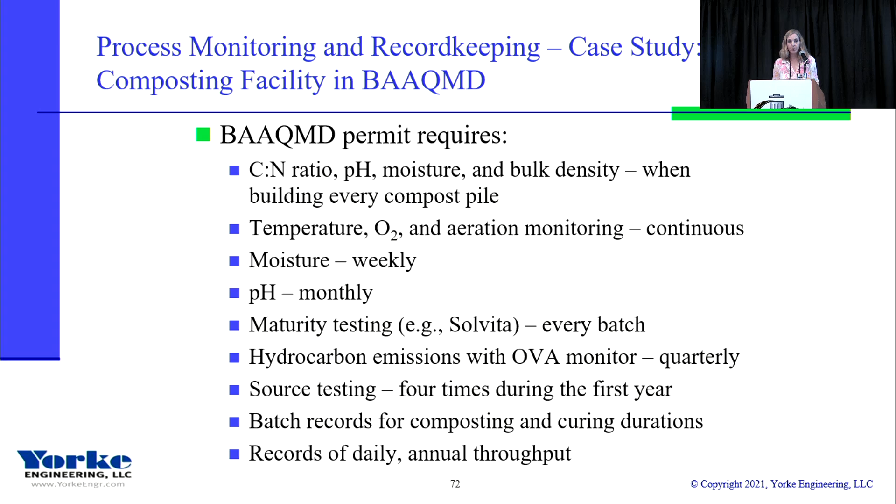Here's an example of a composting facility in the Bay Area Air Quality Management District. The district didn't have much experience with composting, so they basically threw the book at them—an onerous list of monitoring requirements, including frequent testing for VOCs, toxics, and ammonia.

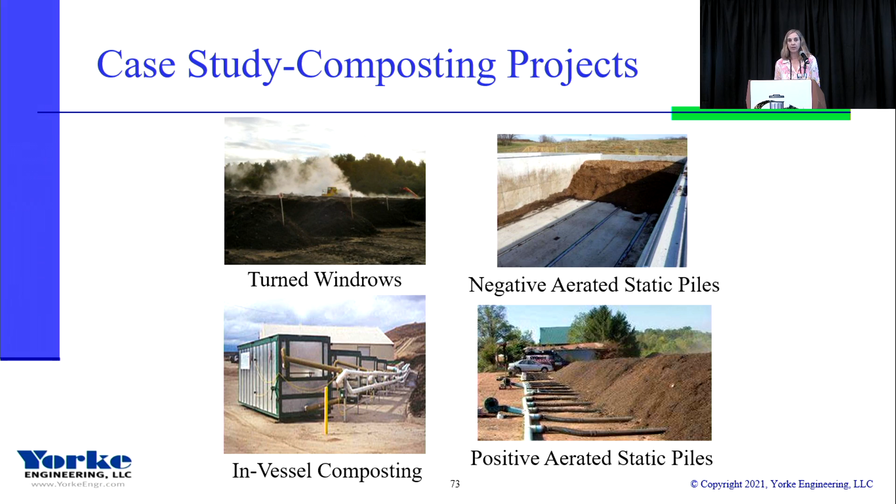Key factors with composting projects: default emission factors can be very large for VOCs, ammonia, and toxics, so you might want to consider source testing—but there are challenges with source testing composting because of the different stages you may need to look at to get a representative sample. Each air district deals with composting completely differently, which is always fun too, and in some districts you need ERCs depending on the size of your project, so the availability of ERCs in the district will be a driver—you'll be looking at VOC ERCs for those facilities. Health risk modeling and odor modeling using default emission factors can actually be problematic and prevent permitting a regular composting facility as designed, so the need to develop better emission factors is definitely in order right now.

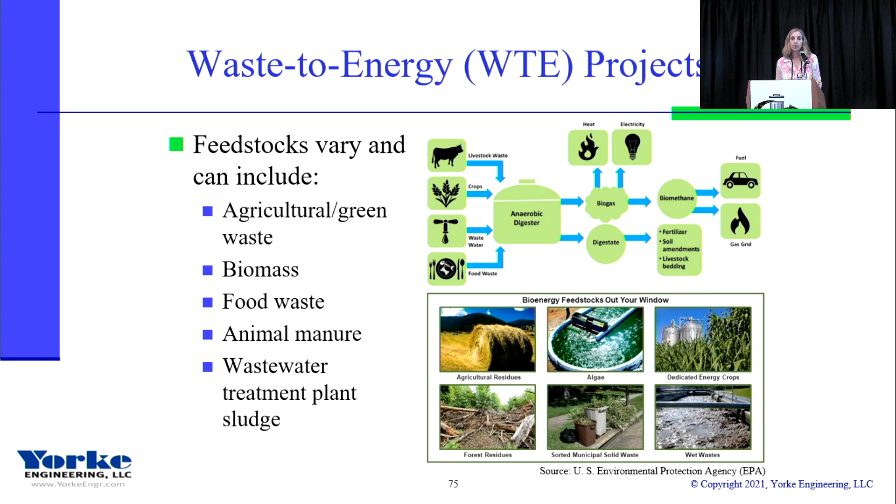Waste to energy projects: most emission sources at a waste to energy project are controlled, but emission factors are not necessarily well developed for these facilities because they can vary by conversion technology, energy generation, and feedstock—each of those needs to be considered when looking at waste to energy.

Here's an example of an extremely small project in the Central Valley. They were using agricultural feedstock for gasification, only running three 100 kilowatt engines, so 300 kilowatts of electricity generation is quite small. In this example, because the air district didn't have a good understanding of gasification technologies, they decided the air toxic emissions should be assessed as if for combustion sources—the engine and the thermal oxidizer treated as a biomass boiler, plus adding natural gas combustion, plus adding metals from a fluidized sewage incinerator.

So they kind of threw the book at it and said, well, here's all the toxics that are going to come off of this. And because of that, the health risk assessment just barely passed. But these are three very small, trailerable units. So needless to say, they had to do source testing for toxics to prove that the toxic emissions are not at that level, because they want to permit more of these units and maybe bring more units onto that same site.

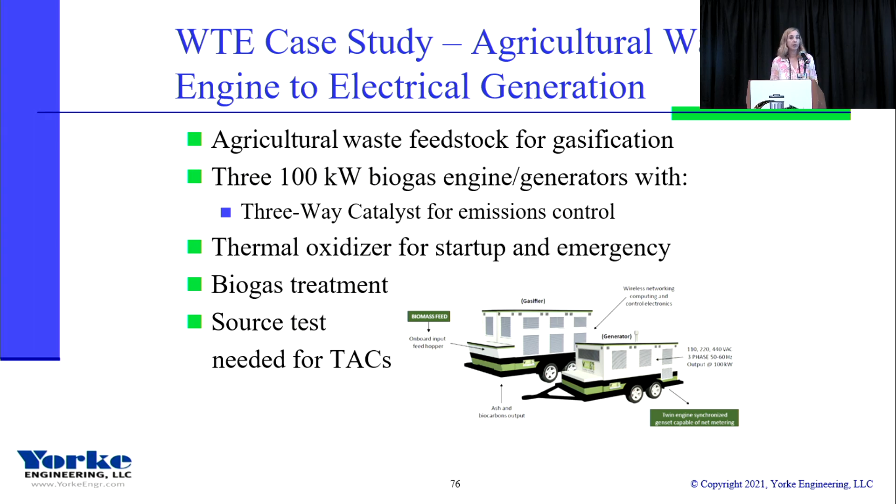So on this one, the project was so small, ERCs were not needed. So that was a good, at least one benefit.

So, keys to success in permitting in California, and probably anywhere, is to make sure that your project is well designed. Get it done, well begun, half done. So get it all designed and finalized before you start in on the permitting process.

Your emission quantification is going to be a fairly significant aspect to it. You're going to want to make sure that if you can get site-specific or feedstock- or technology-specific emission factors developed before you get started on the process. Make sure you've got your control technologies selected early also. And then understand, once you do get the permit, what the cost of compliance will be in the state of California.

Big issues can be the offsets. It's quite costly to get ERCs, especially if you're looking at composting projects, because the VOC emissions can be quite significant. Toxic air contaminant emissions can be significant and will drive your health risk assessment. So anywhere that you can work on getting a more accurate reflection of what your process is, it's much more helpful.

Odors are a high-profile issue, but they're also an issue for control technologies from the district's perspective, from a potential nuisance side, and also from a public perception standpoint. So you'll want to get that under control early on in the process.

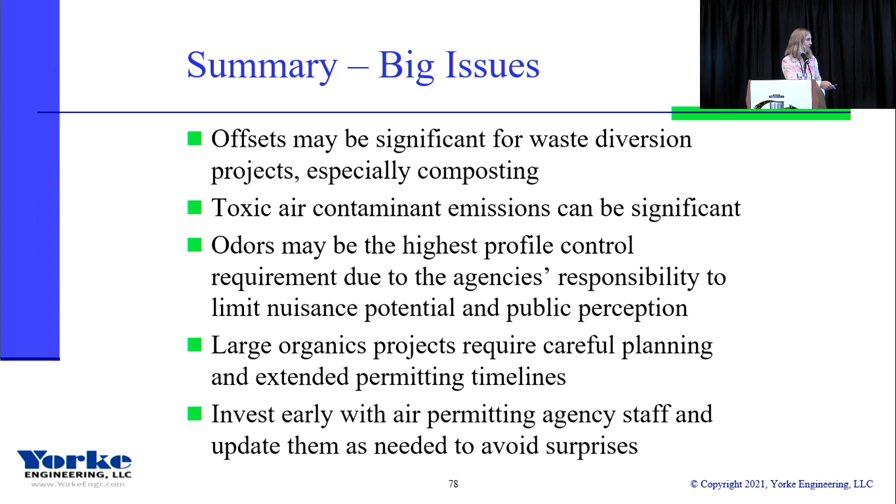Thank you very much, Julie. Do we have any questions? Yes. Can you go back to slide 61, please, if that's possible? Okay.

Looking at the best available control technology, tell me if I'm wrong. Is that telling us what we have to do and how we have to do it? Because if it's telling us how, then I have a problem with that, since I don't know if a government can tell us how to do something, just what we have to do.

So, for example, let's take an engine, or maybe a turbine's easier. If you've got a couple-megawatt turbine in California, you're most likely going to be required to put on SCR, selective catalytic reduction, and/or an oxidation catalyst. Maybe a three-way catalyst can do all of it. But what the district will tell you is that the turbine needs to meet, depending on the size of your turbine, probably anywhere from 2 ppm NOx to 9 ppm NOx. So you need to figure out if you want to do SCR, NSCR, or some other methodology. It's not telling you exactly which one, but it tells you that you have to be able to get down to whatever the emission levels are.

And like I was saying with the composting, so if you're looking at a windrow and they say you really have to use in-vessel composting, you can do a cost-effectiveness analysis depending on the size of your facility and the emissions that come off of it, looking at the dollar-per-ton cost of the reductions you'd achieve by switching to a different technology. And if that's not cost-effective, then it's not necessary to use that technology.